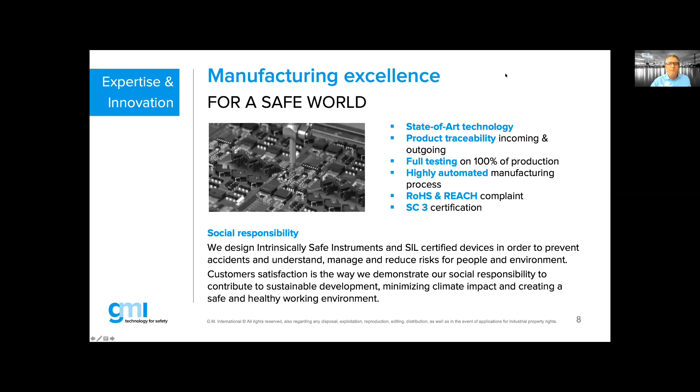We have HART multiplexers. We also have surge protectors, loop indicators, and finally we also have inside the company the capability to support our customers concerning functional safety. We have a division for that. Tino is our director for that division, and through Tino we perform functional safety training, a certification scheme together with TÜV Rheinland. We can provide services in that environment. We can provide one-day seminars. So we are ready and available to share our knowledge.

In the near future, we will have a similar department which will be dedicated to Ex. And also in that case, it is just because COVID stopped our action. Otherwise, today we could mention that officially. So in the near future, we will also have this kind of department following the Ex part, and we will be providing training as well as services around the world.

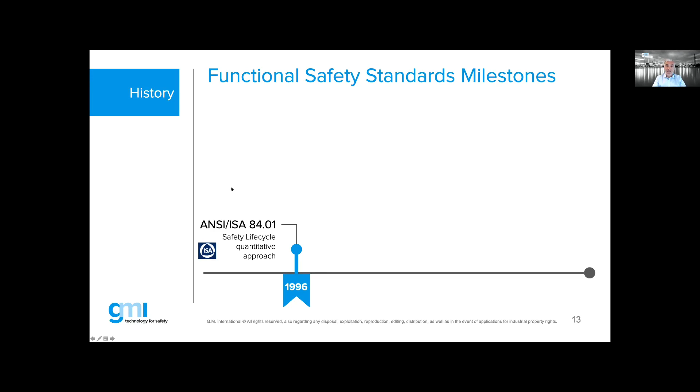So let me start here with the milestones. The functional safety standards came into the industry in 1996, and as you can see over here, it started in the USA with the ANSI ISA 84.01. That was the first lifecycle approach on the market. Very quickly followed, let's say one year later, the IEC committee in Switzerland released the IEC 61508, which is the dedicated standard for the manufacturers, which was also a safety lifecycle. And the difference was that this standard was a quantitative and a qualitative approach, whereas the older one in 1996 was only a quantitative approach.

Now the 61508 edition 1 was out in 1997, as you see here on the timeline, and dedicated to the process industry was the IEC 61511, which was adopted in the US as ANSI ISA 84.00.01. That was in 2004. And I made a small asterisk over here. The only small difference between the IEC 61511 edition 1 in Europe and the ANSI ISA 84 was that in the US, they were claiming the grandfather clause, which was not applicable in edition 1 of the 61511 from the IEC.

Now we moved on. We are now here in the year 2010. That means 10 years ago. A second edition of the IEC 61508 was released. The topic remains the same. It is to cover functional safety for the manufacturers when they want to build or release a product based on an E/E/PE system. That means the first E stands for electrical, the second for electronic components, the third one here for programmable electronic safety-related systems.

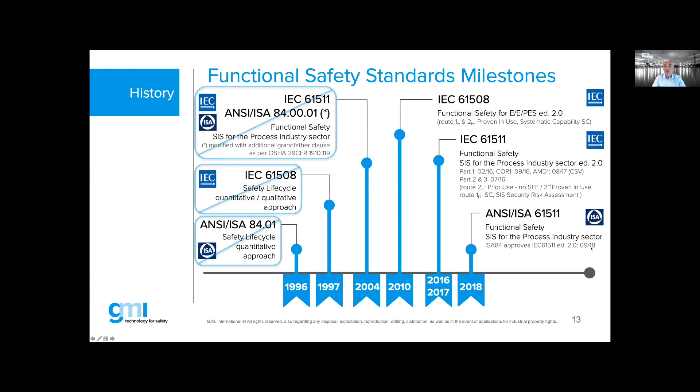Well, you have the 2018 release, which is now called ANSI ISA 61511. So what happened was, when 61511 came out in 2016, we had some issues, it had to be corrected with the amendment in 2017. Well, the ISA 84 committee in the US decided to adopt the standard one-to-one, though there is no grandfather clause difference. It's a one-to-one adoption, but in the US it's called the ISA 61511, and here I refer to September 2018. That's how it physically looks.

That's edition 2. And edition 2 means that we have part 1, and I will not start to read all this text. You can read this when you have the slides, or on the YouTube channel. Well, part 1, that's the normative section. That means anyone listening to this webinar that needs to comply with the 61511 edition 2, the minimum proof of evidence will be the normative section. Part 2 and 3 are informative. That means it's an informative section explaining, guiding, giving you the interpretation on how to use the normative section.

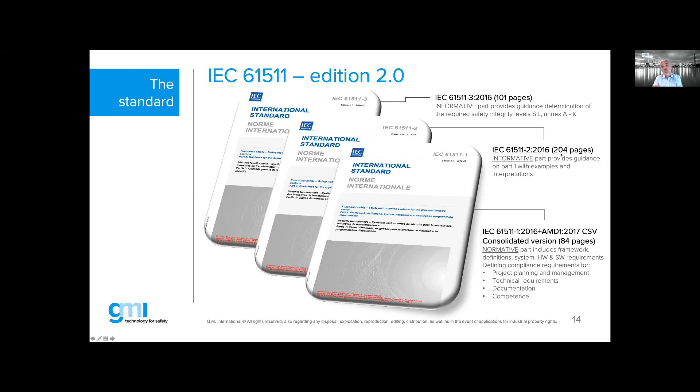In terms of pages, together we are counting about 400 pages, roughly 84 pages on the part 1 normative section, 204 pages to be exact on the informative, and 101 pages on part 3. Right, can I have Mauro please helping me, because now we have a poll question coming up.

Yes, now we are looking for your feedback. Can you hear me, because I lost connection again for a few seconds? Yeah, we can hear you. The camera is off, but that doesn't matter. If you could launch the poll, otherwise I can also launch it here. No. Here we ask for your feedback, yes.

My question is: who of you listening today has access to the IEC 61511 edition 2, or for those from the US, to the ISA 61511 2018 standard? You have a choice, only one answer possible. First, I have access to one of them, but have not read or used it. Second, I have access to one of them and I'm using it. It doesn't matter if it is the IEC or the ANSI.

Option C is I have no access at all. That means you cannot use it, obviously. Or D, you have no time, competency, or understanding to use it. Or I still have edition 1 that I am trying to use. And none of the above is the last one.

I think the poll is still coming in. We have about 56% of people voting, so it would be great to get a few more clicks. It's not costing you money, it's just a click on the poll question. Mauro, it's up to you to decide. We are reaching 70 plus percent. So I think we can stop the polling and share the results with all. Okay. I think you can see the results?

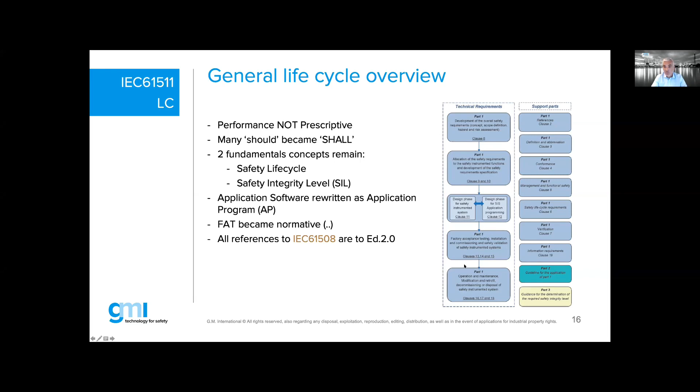So application programming, written as software programming in the older days, is now called application programming. There's a new definition in the standard, which is a lot less restrictive. And the FAT became normative, which is actually clause 13, which belongs here in part number 1. And all references are made to edition 2 of the 61508. Again, the fundamental concepts remain the same.

The safety lifecycle goes from top to bottom, and I will show you the slides in a minute. And it's a performance-based design which you try to predict in numbers. And that number, or that PFD expression for those specialists listening in, is known in the industry. What is the likelihood something will not work when I need it? We call this the probability to fail upon demand because of a dangerous failure.

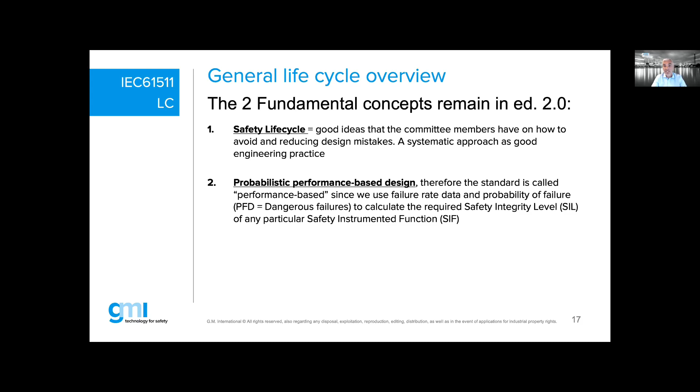So think about that. Whatever you are using out there, there is a likelihood it will not work when you need it. And that's what we try to predict with a PFD. And that is what we try to express in a performance band. And that is where your famous or infamous SIL bands are coming from.

Right, the lifecycle itself is coming from the 61511. It has not changed. The only small humble change here is number 13 and phase number 4, for those who can see that, where the screen is big enough. You see my cursor moving around number 13. That's the only subtle change in the picture of edition 2. The rest is a one-to-one copy.

Now, I will walk you through very briefly, although we have some supporting text after here. Let me just do a quick test. No. Okay.

So we have here phase number 1. Every project's success story starts with how well you have done the identification of your hazard. How well have you analyzed your hazard? In other words, have you brainstormed, once you have the hazard escaping or released in your plant, factory, or unit, what the potential consequences are?

And we as engineers can very easily consider the consequences if we know the volume of the content of the hazard, and which people, installation, or environment is around that installation. It's logical, almost straightforward to think about the consequences, and we will happily agree with each other. The thing we as humans can never agree on is how you decide how frequently this will happen. And that's going to be the first challenge.

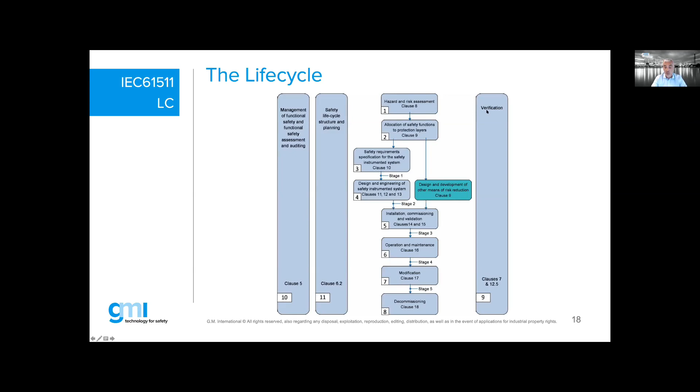Right, I will skip this and I will jump into my second poll question of today, which I am launching now. Yes, which is: in edition 2, the lifecycle activities and requirements are changing per SIL level. That's the first answer you can pick. Or are irrelevant of whatever SIL level you try to achieve. That's the second answer. Or are not applicable for safety instrumented systems which were built before the release of edition 2. That's your third option, or none of the above.

And I see we have some more participants joining, so I hope you find it worth it to just click. I mean, there is no score, you don't gain points for it. It's purely to show what is the impression of the people listening into this webinar.

And excuse me for a second as my voice is getting dry.

And as I'm in Belgium, you don't have to worry, I'm drinking water. So we don't have the good quality Belgian beer here. I don't know if I'm allowed to say that on a live webinar, because you can say this is marketing for Belgium. So apologize, we can cut this out on the recorded version.

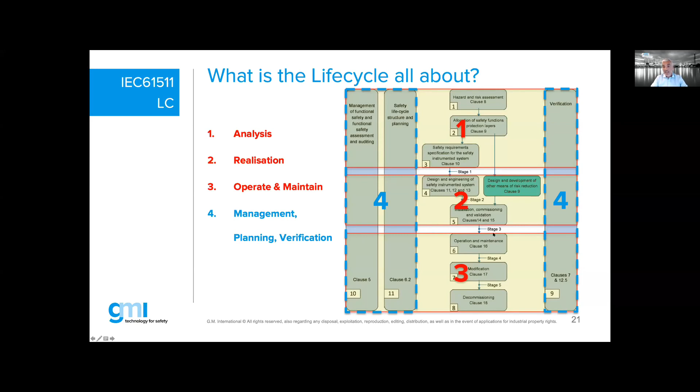We have the analysis, realization, operating, and maintenance. Those are the three big blocks in the life cycle, which remain the same in edition 2. And you can see here the block number 4, that's a generic section. So the management is the same, regardless if you are involved in a HAZOP, or in an installation commissioning, or as a maintenance engineer to do some calibration on your systems. It is for all of us. It doesn't matter which activity you are active in. So the planning and the verification and the management is generic for all the other phases.

I made here a summary, again to save a bit of time. That is why I spent more time explaining the life cycle model when you saw the bigger picture. Well, in the analysis phases, which is called phase 1, 2, 3, it requires that you will identify your hazard, you will analyze your consequences, you will look at your tolerable risk, which is mainly your corporate risk for the operating companies or end users listening into this webinar.

Once your tolerable risk is not met, after you have done the analysis maybe of your layers. We had a session two days ago about the SIL manual of GMI. Some people asked the question, is it possible that some end users or some projects can skip LOPA? And I told them yes, because some companies' corporate offices will have their corporate risk matrix, which is calibrated in the sense that if they need a SIL 1 protection, they will ask you to build a SIL 2. In that particular example, you will not use LOPA, you will skip that.

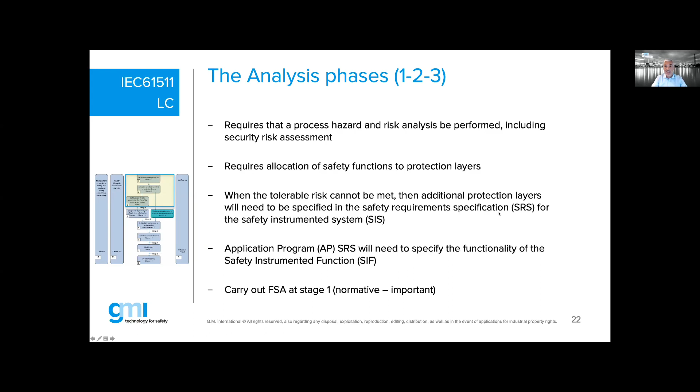So you don't have to follow that specific phase number 2 if you are one of those companies that go by a risk matrix, which is typically one SIL higher, a conservative approach compared to the SIL you would initially need. And I like that approach because you are investing in safety and not trying to play with numbers like some other companies try to do. If tolerable risk cannot be met, then you have to define in your SRS a specific additional need for risk reduction.

Then we go to phases 4 and 5, which are the realization phases, where you physically build systems, find equipment, and program it. In the middle you have stage 2, which I skipped on the previous slide, or stage number 1. But again, we're going to do a functional safety assessment webinar in the upcoming weeks. It's all in this month, I think, if I remember well.

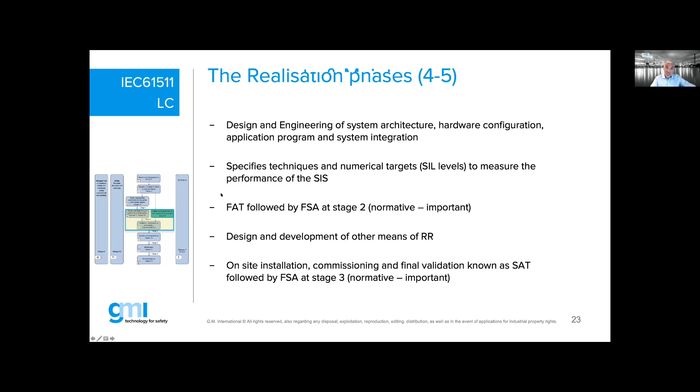And then we have stage number 3, which is a very important one for the end users listening into this webinar. Before you introduce the hazard in the field, you shall carry out this assessment, called the stage 3 assessment, by a senior competent person who is not involved in the initial design phases of your project. He must be senior, he must be competent, and he must be independent.

Last but not least, we have phases 6 and 7, which are operation and maintenance. Again, this requires field data to be collected, your data, and not data from databases you may acquire or from your vendors. That's not the purpose of the standard. It's your data from your experience in your environment. And then we have required proof test efficiency and consistency. On Thursday, in a week from now, we do the topic called safety manual, and there I will speak more about where you find those efficiencies and consistencies.

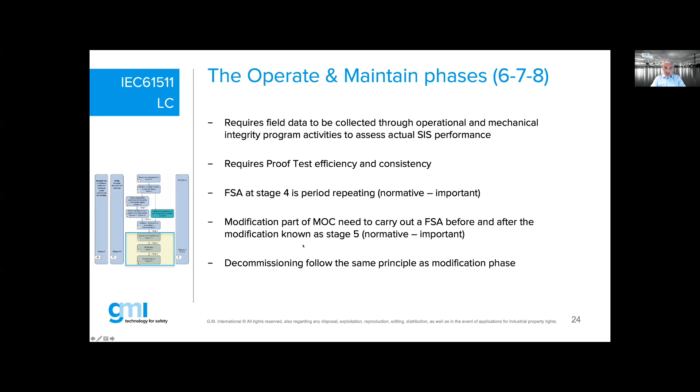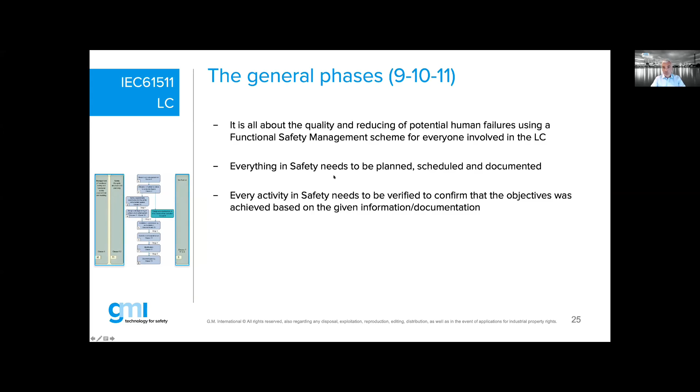As I'm running out of time, I have to skip to the last slide, which is general phases 9, 10, and 11. Again, that's your functional safety management, your planning, and also your verification.

I think we have the last poll question of today. It is not the last, but it is the next. Oh, it's the second last. You're right. It's the second last. I launched this right now. Okay.

So, it's a GMI interest to know, of the people listening into this webinar, who of you have followed a competency program on functional safety 61511. Option A, you followed it based on edition 1 and today still have a valid personal certificate proving you are competent. Or B, you followed edition 1 but had no interest to renew, so it is currently expired. Option C, you followed edition 2 recently, after 2016, and still have a valid certificate. And the last one, none of the above.

And again, we still have an increasing number of participants. So we're really grateful if you just let me know, because I have no other way to check. How many of you have followed the training? Not that I'm trying to sell training here, but just as an interest, how many people out there are still today with maybe expired certificates or no certificate at all.

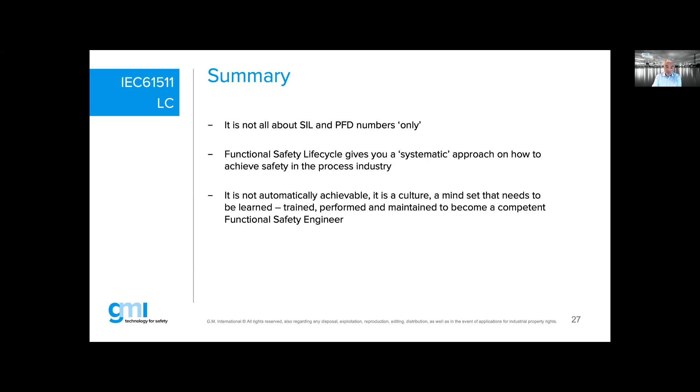And I know we engineers don't like to be told how to do things. We think we know better. Unfortunately, as I was saying in one of my other webinars, people often don't know what they don't know until they are told what is supposed to be known, and then they may recognize there was a gap. So we can help you as GMI, as Mauro was saying, with services for functional safety. We have services on IEC 61511 lifecycle support.

Sorry, Tino, can I interrupt you? Sure. There is a question strictly related to what you just said. Would you please review how long the competency certificate is valid for, and what steps or processes are required to renew an expired one?

Okay, that's an easy question for me, being a course provider under the program called TÜV Rheinland. I was one of the initial trainers starting in the very first year of the program. And I also helped define the program to what it is today. So I know that program best. I know there are many different programs out there in the market.

I'm very happy to say that the program I joined and still support today is the most successful in terms of number of people. I was talking today to a client who was asking a similar question. We have 20,000 people today in 2020 that are trained and certified in functional safety in a specific domain. In safety instrumented systems alone, the program we are talking about today, we have roughly 13 to 14,000 people. The rest are from different programs.

Now, to answer your question, the certificate is valid for 5 years. The first 5 years there is a certain structure to renew, where you do not have to go to a new training and to a new exam. For the first 5 years, you have to follow some guidelines, you have to show some evidence, and based on the approval cycle from TÜV Rheinland, they will grant you another 5 years as a validation.

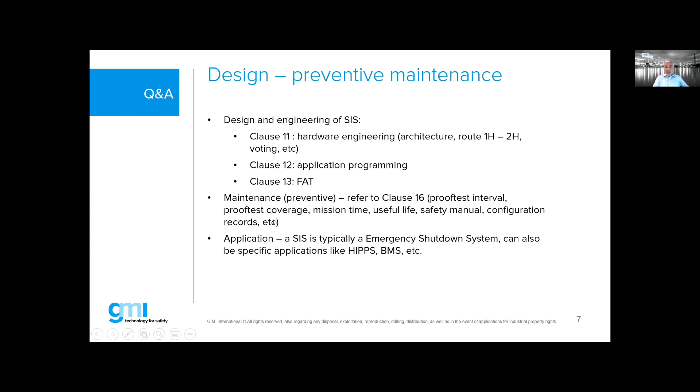So, simple question. What is the impact of 61511 on the process industry? Okay. I was starting to laugh. I should not laugh. Well, you may have already noticed that I'm skeptical against the SIL numbers that I see flying around in the industry.

And the pity is that people that are maybe not competent or maybe very easy to believe some paper think this is true. So edition 1 was released 2004. Despite the good engineering practice, as you have seen, many of you have not even access to it. So it's a good engineering practice. Doesn't make sense if you have no access to it, if you are not using it. So we want to minimize the human failures, but you will have to start to read what is the purpose of the standard. Otherwise, I guess the whole intention of the standard is missed because you're not using it.

Edition 2 was released 2016 for the main reason that exactly what I said, the SIL numbers and the failure data coming out of a generic database is maybe not what the industry needs, right? I know a generic database, without mentioning it, is coming from the Scandinavian offshore industry, and people in the Middle East somewhere sitting in the Sahara are using that data and thinking it's the right number for them to use. That is how people think some numbers are actually to be used.

I hope, Mauro, you were trying to push some slides now because mine is all of a sudden going... Sorry, it was my mistake, yes. Can you go back to the slide I was just trying to explain? I'm trying to do that. All right, okay. Don't touch, no. No, we are too far away. You have to go back. One back, stop. Up. Okay, stop here.

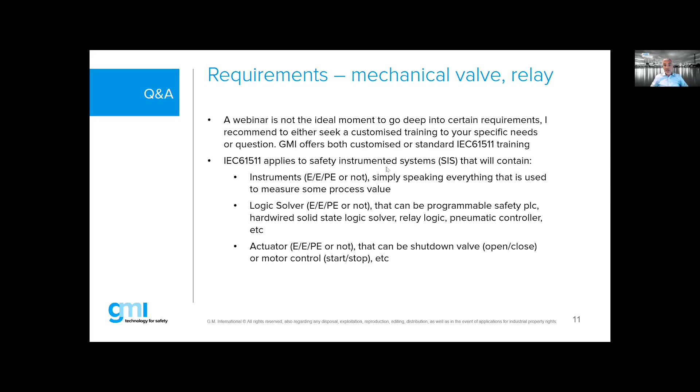And Mauro, let's just speed up to the last. If there is still one more. It is the last one, this one? Yeah. So, shall I read it to you?

No, it's fine. What is a true safety assessment in design and implementation of a SIS lifecycle? I think this even came out of the registration, if I remember well, from the previous one, but it doesn't matter. You can show me the slide which I prepared.

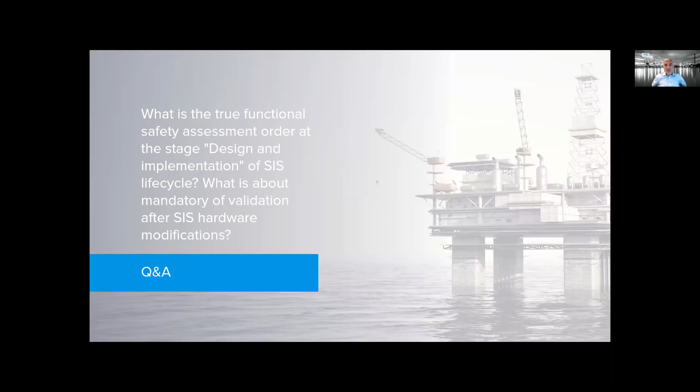Right. Okay. What is a true assessment? For us, an assessment is purely an expert judgment of a senior competent person which is not involved in the design when you are talking about the design and implementation phase activity. Meaning, you are talking here about stage 1, 2, 3. And I clearly mention here only stage 2 and 3 of the life cycle because now you are designing the system. That means you are in your phase 4 and 5.

And the FSA 2, or stage number 2, is typically witnessed during an FAT. And the expert witness, as the word is saying, needs to make a judgment. And stage number 3 is before introducing the hazard in the field. I even talked about that; we're going to do a webinar later on this month. Modification is in phase number 7. That is where you have stage number 5 coming in, and in stage number 5 you will do it before and after the modification has been completed.

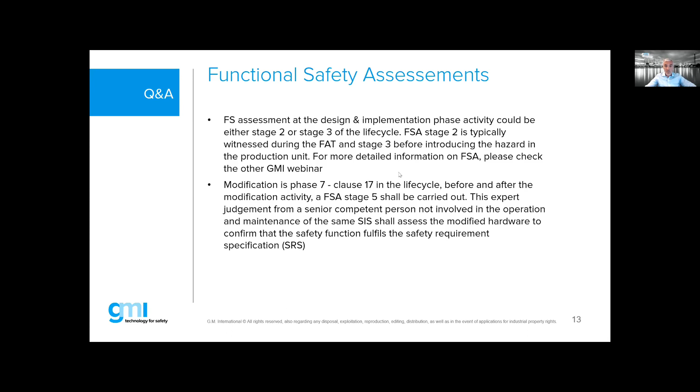Okay, Mauro, let's just jump and hope there is no more. No more questions, not at least during registration. Okay, this is just webinar questions live. Okay, right. Let me just read the question.

What evidence is required in order to claim a project is compliant with IEC 61511? Well, as you would already understand from what we have explained in the previous minutes, at least the project needs to provide evidence that you follow the life cycle. And how can you follow that? By evidence of functional safety management, adequate compliance as evidence.

Right. Now, I have one more question because the other one is not really related. It's more to the intrinsically safe barrier, so that's one for Mauro to answer. The second one: do any manufacturer companies track the records of their instruments supplied to third parties to be used according to 61511? Is there any check, or is it only the end user's responsibility?

Well, that's a bit of a mixed question. An end user is required by edition 2 of 61511 to collect data, quality data, as per two guidances. One is the NAMUR 130 guidance, the other one is one of the ISA reports. It's also written in the standards. They tell you how to collect your data and what to collect. You need to have a confidence factor of 70% for the collection of prior use data of your own equipment. That is part of your question.